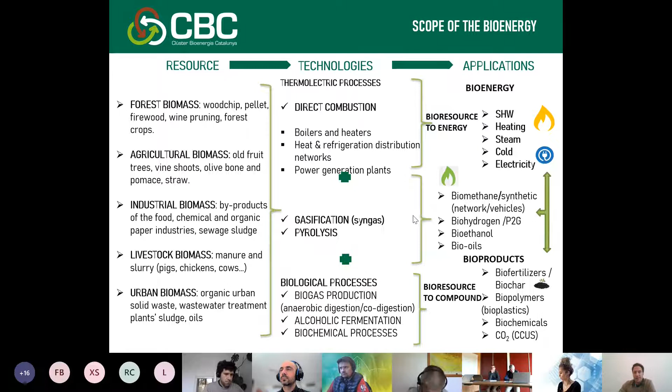Okay. Also, we have a strong opportunity to use biomass and the resources to make other products, byproducts, no? And how we could use them instead of plastics, as biopolymers, or as other types of biofertilizers, for industries that, as you know, are paying for energy. The cost of energy is very high at this moment.

Okay, in Europe it is the main renewable energy consumed at this moment, with 11% of the gross final consumption, and it's occupying 85% of the total thermal renewable energy. It's related to heat production. We are not talking about electricity, and it has a huge impact in decarbonizing our continent. Also, what is important is that the bioenergy industry in Europe is leading in technology, because over 74% of the global bioenergy suppliers are in Europe. And the situation of scarcity of materials and other products, or rare metals, for example, is not affecting our industry so much.

And also it's interesting in terms of job creation, because we need to use energies that help to create jobs on the land, in the countryside. So we need to promote this energy. Important to know that bioenergy is our circular energy, and we have to promote it as much as we can. And the bioeconomy is another step, no?

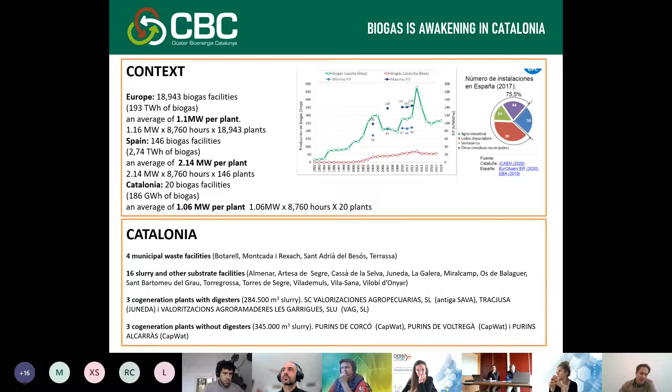Okay. Apart from that, with the current resources, we know that Spain could be the third European country producing biomethane. And we know that we could cover between 25 and 65% of the current natural gas demand.

There is some. Oui, tout à fait. Marc, we cannot hear you. Yes. You are in mute. Are you here? Yes. Yeah.

Okay. So sorry, so as I was saying, biomethane production in Europe has a strong potential, especially in countries like France and Germany, but also in Spain. And according to our experts, with the current resources here in Spain, it could be the third European country producing biomethane, and could cover between 25 and 65% of the current natural gas demand.

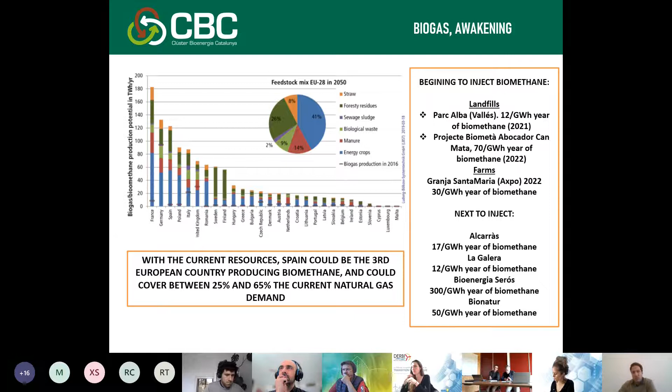We have some projects already injecting biomethane here in Catalonia, related to farms and landfills in this case, and there are some nearly to inject, because they are also managing the legal permits to do it. And this is the situation now. We hope that this year we will solve some issues here in Spain related to the biogas production and all the related legal framework. So we have a strong expectancy to develop the biogas market this year.

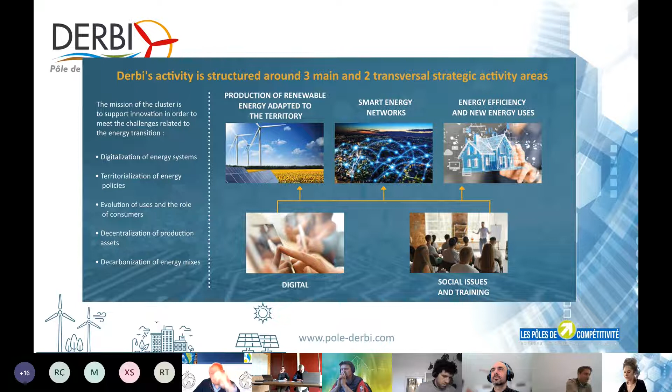So today, the DERBI competitiveness cluster, I will say just DERBI to be quicker, counts 170 members, including companies, research centers, laboratories, universities, higher education establishments, and institutional partners and local authorities. We can see in this page that our members deal with all sectors of energy transition, and we have 68 of these members in bioenergy, without counting the companies known for solar, storage, wind or other renewable energy, which also have projects in biogas or biomass.

So to talk more about figures in France and more specifically in Occitanie, our region, first of all, I would like to share with you some figures about biogas and methanization in France. We have more than 1,300 biogas units, with about 72% cogeneration units and 28% injection units.

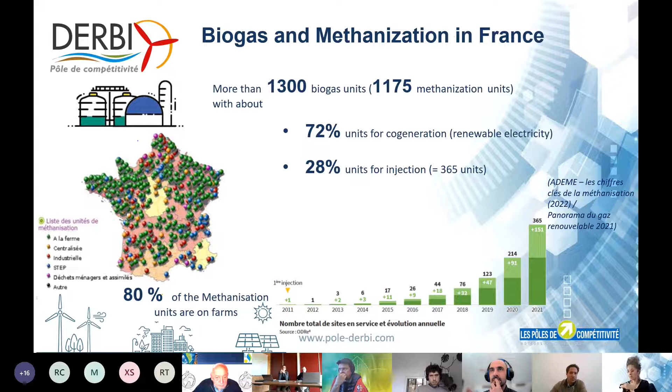At the bottom left, we notice points of different colors on a map that define the different types of biogas units. You can notice that the color green is the most present, which represents that 80% of biogas units are on farms in France. At the bottom right, we notice the increase in the number of sites in service in France. So now let's focus more on our region, Occitanie, which is near Catalonia.

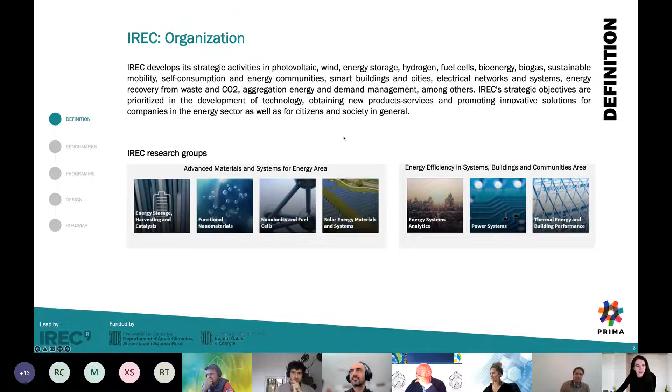Okay, thank you, Ramon. Regarding the laboratories we have at IREC, we have always worked in the blocks that Ramon mentioned. We have many labs. Some are more focused on materials and components, so you can imagine chemical engineers or physical engineers working on the components and materials. We also have 2 labs which are closer to the market and to the testing of technologies and systems.

These are the SEILAB based in Tarragona and the Smart Energy lab based in Barcelona. Those 2 labs, although very good for the validation and demonstration of these technologies and their integration as part of the system, have some limitations. We have only so far been able to try and test technologies up to TRL 6 or 7, meaning up to relevant environments, but not real environments.

So back in 2019, IREC proposed to the Catalan government the PRIMA platform, which aims to cope with the gap we have had so far at IREC - the gap between real environment validation and the technologies prior to their market release.

So our aim in PRIMA, our objective for the near future, will be to validate and demonstrate technologies, and to help and support companies - especially Catalan and Spanish companies, but also companies from Europe and abroad - to validate their technologies and develop them before they are released to the market.

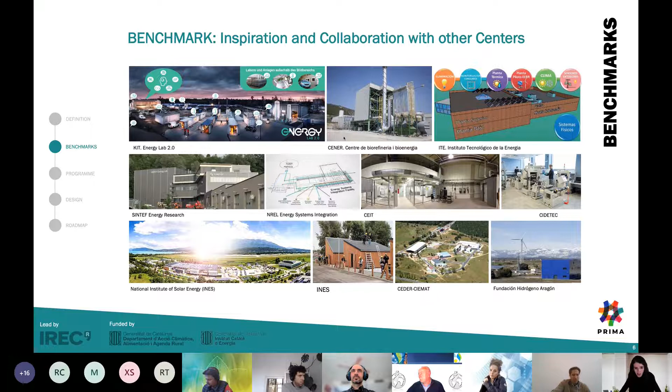Storage in terms of electric storage and thermal storage, climate neutrality by developing technologies in decarbonization, removal of fossil fuels in thermal activities especially. That means more use of biomass, biogas and hydrogen.

In terms of waste and bioenergy recovery, probably the topic most relevant for today's session, we are working to develop a bioenergy plant where we can deal with the energy recovery of organic waste from livestock and the agri-food industry, to increase production of biogas, the quality of biomethane, biohydrogen, and different types of renewable gas. Also, I'd like to mention that our PRIMA platform is located in the countryside of Catalonia, in Osona, which I'll show later.

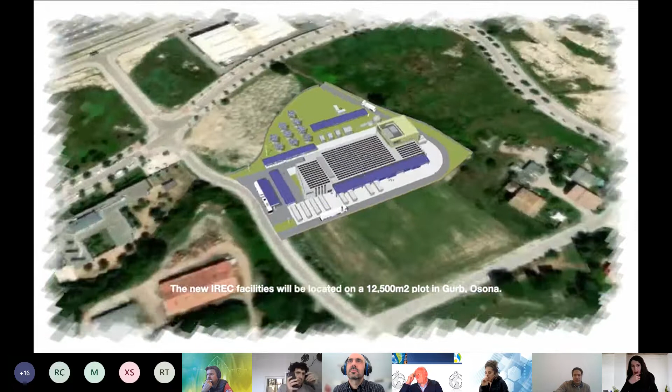So, as I said, we are planning to build the PRIMA platform in the center of Catalonia, in Osona, and it's going to have a building of about 3,000 square meters with an area of outside space of 12,000 square meters. We are planning to have lots of energy from renewables, so we can be as self-sufficient as possible and as energy positive as possible.

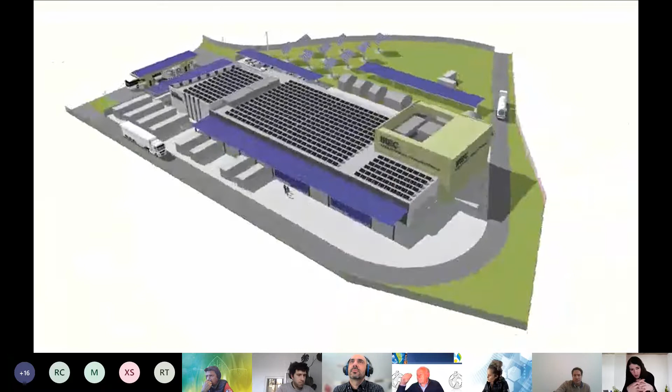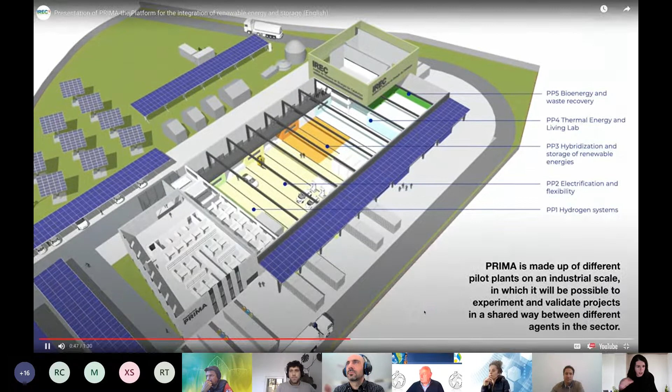We will have a space for the test of hydrogen systems, biogas, also different concepts of methanation and biomethane. Also inside, as you can see here on the left, we will have offices for companies and also offices to host people from other institutions abroad or also from PhD students.

And basically, we hope that by offering this installation where different energy vectors can work together, we can push on this energy transition. I haven't mentioned it so far, but we also will have a hub for sustainable mobility, where we plan to install a hydrogen station, a biomethane station, as well as electric power charging stations, ultra rapid, by the way. And yeah, that's basically the PRIMA platform.

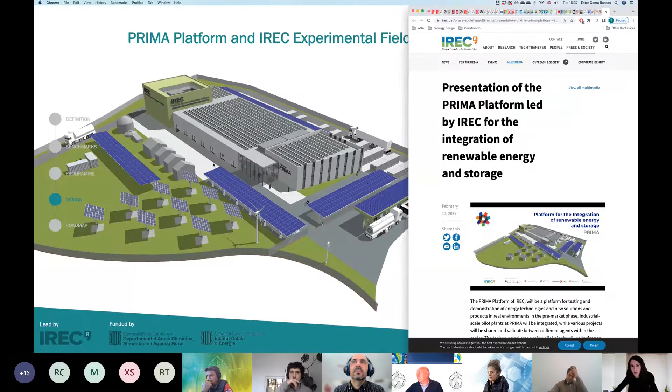You can know more about it on the website. I'm not going to extend on that because we don't have more time. Also, if we share the presentation later, you have the chance here to look a little bit about all the different facilities that we are planning to offer within PRIMA. You can read that in more detail. It's what I've been explaining in the video, but here you have a bit more time to read it and have a look.

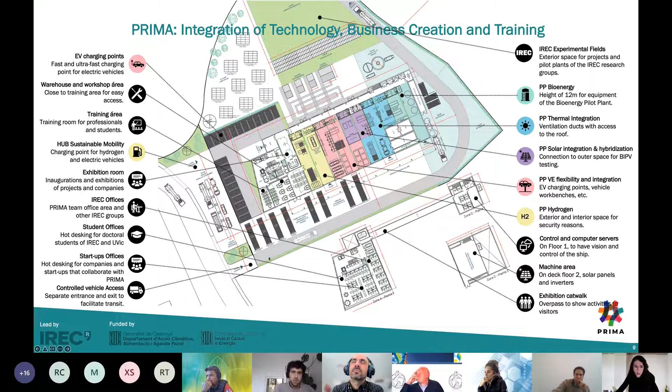The different pilot plants that we will have: the bioenergy, the thermal integration, the solar integration and hybridization, flexibility and integration, and the hydrogen plant. All of them will have not only the inside space, the space inside the building, but they will also have some space outside to bring containers, lorry containers, and do the tests outside.

And finally, to finish now, a bit of a roadmap so you can know where we are in the project, and hopefully we can collaborate in the future when PRIMA is ready. So far in 2021, we have developed the definition of the project brief, the agreements between the political institutions and IREC to get a place to go and a plot of land to build our building.

At the moment, we are at the design stage, starting the tendering process, not only of the project, but also of the construction of the building. And we hope, our aim is that by the end of this year, we will have started the construction of the building. So by mid-2023, we have the building ready to start the operation of the PRIMA activity.

We know that it's quite optimistic, and especially when you have tenders and public tenders, but we also know that the energy transition is essential, and we want to be ready for that. We will see if we can achieve our targets, but that's our aim.

And before I finish, I would like to say that although PRIMA is not available as a place yet, IREC is welcome to collaborate with any of your institutions, and also we can start developing projects and consortiums together. So when PRIMA is ready, we have the projects, also the funding ready for it.

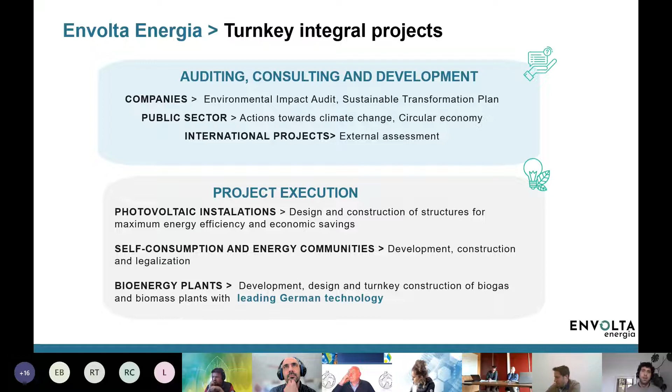Our integral vision of a project: we audit, give consulting, and then the development of any project in renewable energies for both the public sector and private companies. And we also develop international projects. For photovoltaic installations, we build turnkey here nationally. And for the bioenergy plants, as I said before, we rely on our international partners. In the case of biogas, it is EnviTec Biogas.

EnviTec Biogas is a leading company in Europe. It's the first supplier of turnkey projects in Europe. It covers the entire value chain of biogas, from development to construction and even the operation of the plants. EnviTec operates its own biogas plants, so this allows big investment in R&D to be more efficient in gas production. The annual turnover of EnviTec Biogas is 190 million euros. It has more than 500 employees with 16 subsidiaries around the world.

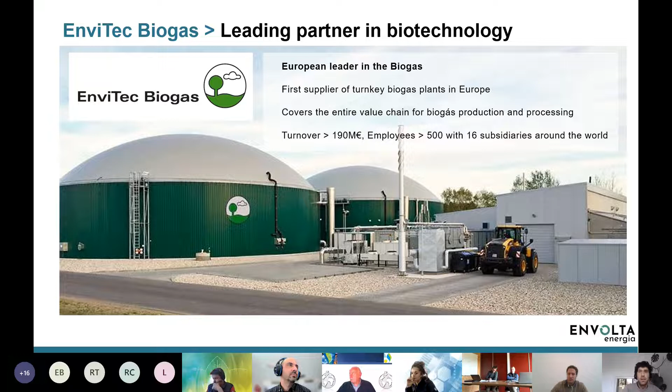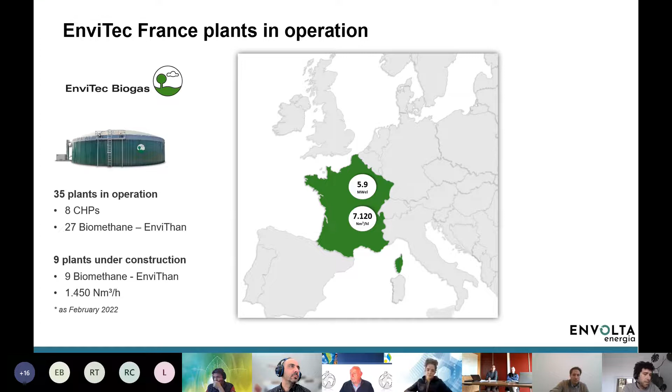I'd like to explain today what EnviTec has done in the last years, a lot of plants in France, but also explain what it is doing with LNG, which is what I consider the paradigm shift of biogas in Europe. Internationally, EnviTec built more than 700 plants. In France, there are 35 plants in operation, 9 plants under construction, and some more in the pipeline. So EnviTec has participated in this big increase of biogas plants in France in the last years.

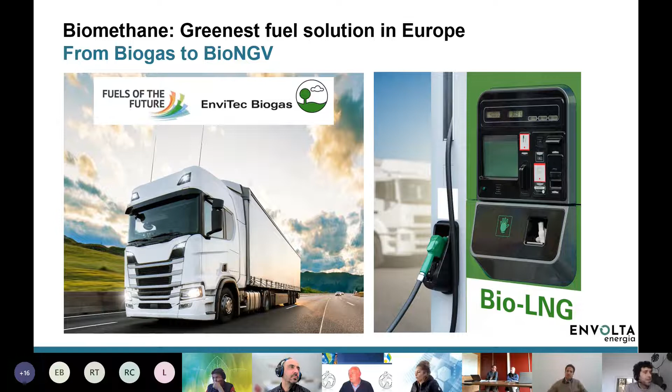Today, EnviTec is shifting from the traditional biomethane plants to bio-NGVs. Bio-NGV is the use of natural gas for vehicles from biogas, biomethane. The application of bio-NGVs opens a big potential where it no longer relies on the aids from each country, and provides a global market. EnviTec foresees a big demand for bio-NGVs. So bio-NGVs are mostly bio-CNG, which is bio-compressed natural gas, or bio-LNG, which is bio-liquefied natural gas. EnviTec has pilot plants and operational plants both in bio-CNG and bio-LNG.

What is the difference? Bio-LNG is when you cool down the biomethane or the natural gas. So it has more density, it takes less storage space, and it is an easy replacement for a conventional diesel motor. This makes it a good solution for long-haul truck companies and sea vessels. LNG can also be transported in tankers or in trucks around Europe. The difference with bio-CNG is that it's easier to refuel in the stations and also needs lower investment costs. So both alternatives are very good. It depends on each project.

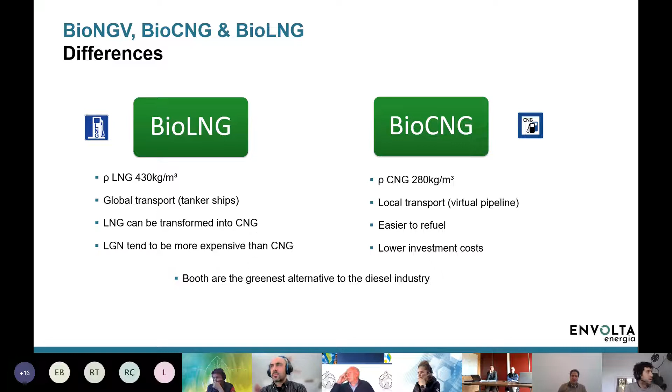Why do we expect a big increase of bio-NGVs? The Renewable Energy Directive 2 in Europe, which was approved in 2018, implements a uniform framework for renewable energies in the whole of Europe. It includes legally binding targets on each country of a 32% share of renewable energies, a reduction of greenhouse gas emissions of 40%, and requires an advanced biofuel and biogas quota of minimum 3.5% in the transportation sector. Also, it brings a global system of computation for the CO2 certification of biofuels, which will be under guarantees of origin.

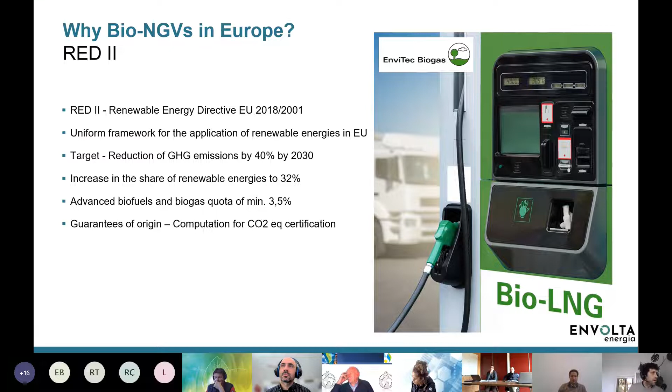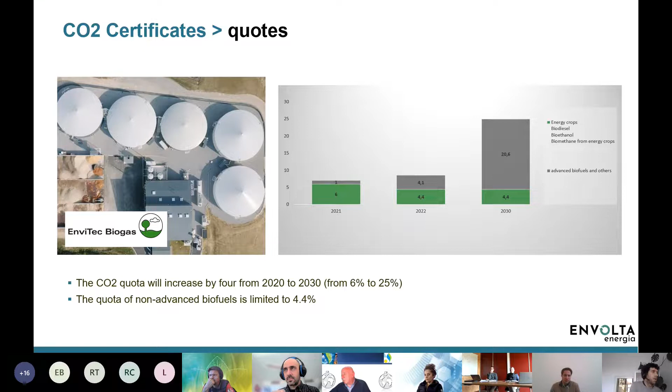So you can imagine that bio-LNG and bio-CNG are really a good solution for heavy transport, which needs a quick solution. It is also a solution for sea transport and cruisers. It's a solution that is already available. It has a low cost of investment. It reduces a lot of other harmful gases from combustion, like sulfur oxides and nitrogen oxides, and reduces noise emissions. For transport and logistic companies, this means lowest cost with more sustainable transport.

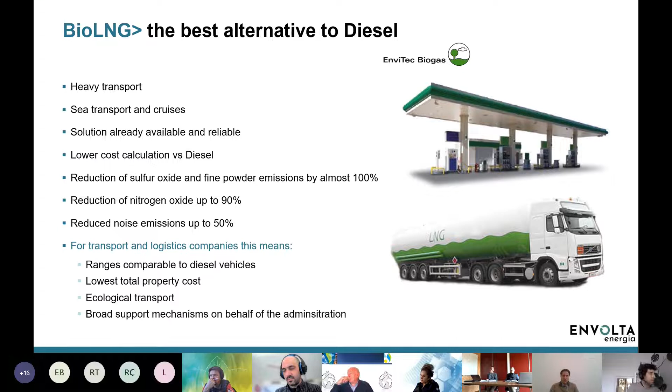So the case study I bring here today is the bioenergy plant concept. EnviTec bought a plant that was already built by EnviTec. In 2009, it was one of the biggest plants in Europe with electrical production in mind, and it's transforming it to produce LNG. The LNG will be produced not only in this plant, but in other plants of Germany, and it will be liquefied in this plant. After liquefaction, the LNG will be transported to gas stations, and then the GHG quota will be traded. So this is the case study.

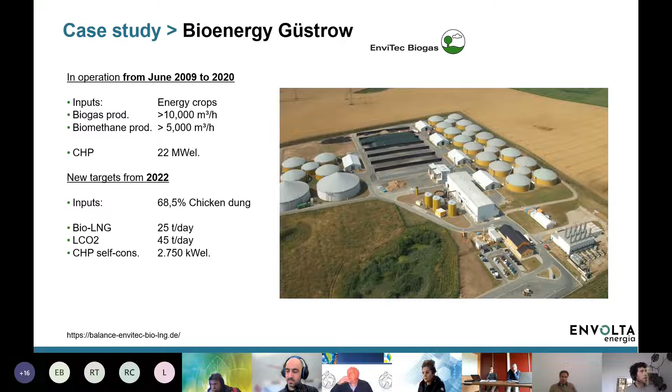Built in 2009, it was producing 22 megawatts electric with more than 25 digesters. As many of the biogas plants in Germany, it mostly used energy crops. As I presented before, now the interest is on producing biomethane from manure. So EnviTec prepared this plan in order to receive chicken dung instead of energy crops, and is doing this transition. The target from 2022 will be producing 25 tons of LNG per day, and also using the LCO2. This is the off-gas you have once you upgrade the biogas. You have biomethane and you have CO2. So it will treat also the liquefied CO2.

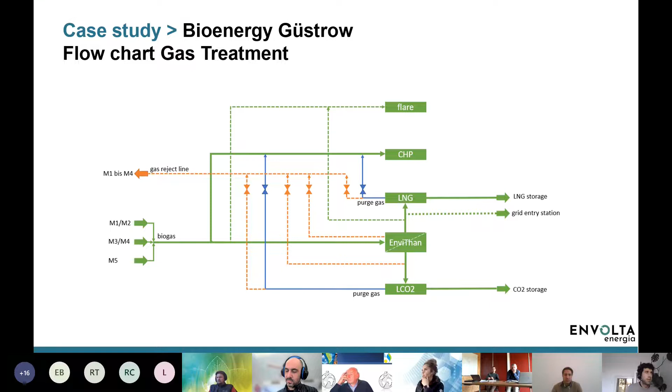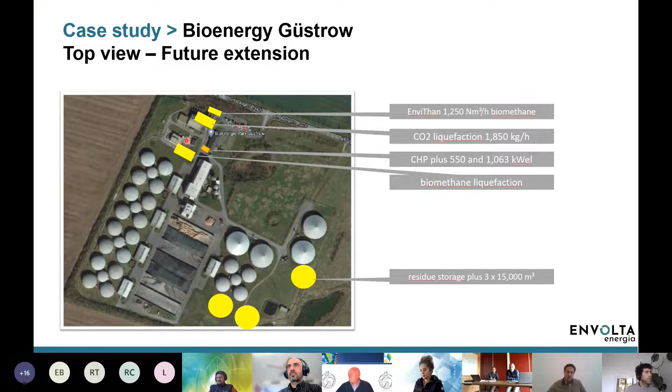The plant is not a small plant. It was built with modules of biogas digesters, 5 biogas digesters with 1 intake tank for liquid manure, and this modular design was replicated 5 times. Also, there were the CHPs and the residue storage tanks. The extension of the plant plans the building of more residue storage tanks, together with a biomethane liquefaction plant and the biomethane upgrading plant. So this is how the bio-LNG plant will look.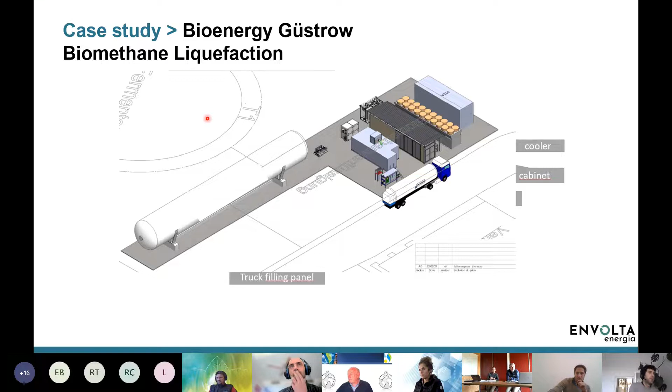Marius, it's time, 2 minutes to close. Yeah. So it's mostly over.

So bio-CNG and bio-LNG are a real, actual alternative to diesel. It's a solution we have today, and it's a solution that can represent a very big reduction of CO2 emissions. This is why we believe it will be strongly developed in the coming years in Europe.

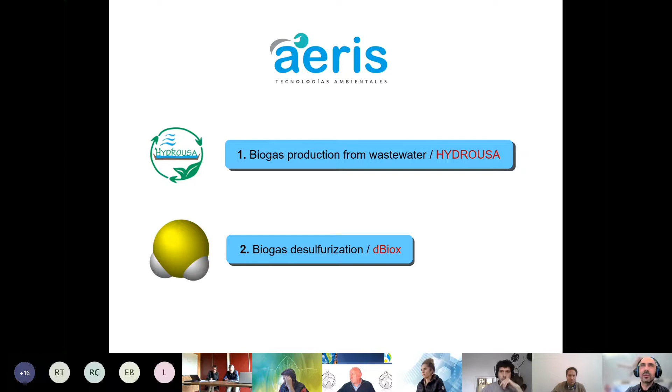So today, in regards to these things we are discussing, I would like to tell you mostly about two technologies that we have that are deeply related with energy production and saving. Number one would be our HYDROUSA technology, which aims to produce biogas directly from wastewater. And the second technology, which we commercialize in partnership with Ecotec, would be the bioreactor for biogas desulfurization. So it's two different technologies, not related to one another, but I believe that they fit quite well in today's session.

So very briefly, I'm showing you the HYDROUSA project. This is a publicly funded project from 2020. And it aims at developing innovative solutions that can cope with water scarcity in certain regions of the European Union. For example, in Mediterranean countries, on our eastern coast in Spain, we are suffering from water scarcity. We are aiming to find a solution for these problems within this project.

So what we do here is to use wastewater, rainwater and water vapor from air, different water sources, and we try to produce something valuable out of them, like biogas or crops or different added value products. And at the same time, we try to develop advanced and profitable business models that can give some richness locally to the places where these are implemented.

Okay. So as you can see, the diagram of the project is quite complex, but I would like to focus your attention here. This is a UASB reactor, which has been designed and developed by AERIS and which aims at treating wastewater from the local town of Antissa on the island of Lesbos in Greece. And currently this system is treating all the wastewater from this town and producing some valuable products.

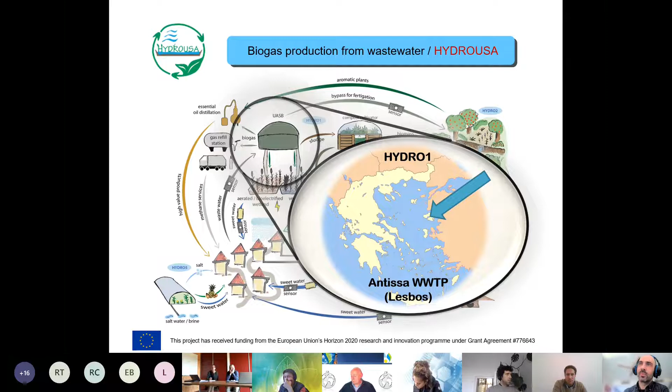Let me show you. As I told you, this has been implemented in the wastewater treatment plant of Antissa in Lesbos, and it consists of a series of processes which turn wastewater into valuable products. So first of all, we have this UASB, which is a kind of anaerobic digester, which treats wastewater and produces biogas and some other valuable compounds. So wastewater, this is the red arrow, goes out of the UASB reactor partially treated. More than 70% of the solids and of the COD has been removed.

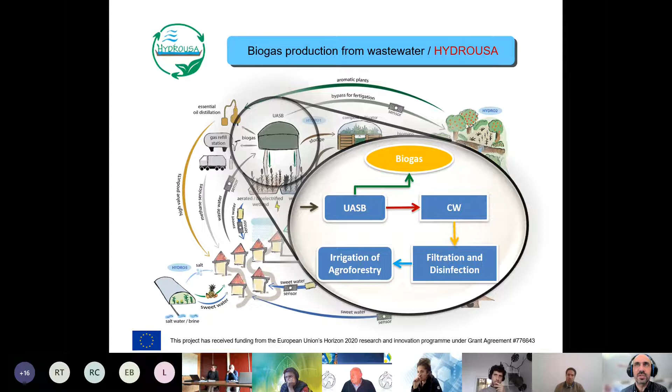Then it goes across some constructed wetlands in which the purification is completed. Then wastewater crosses some processes of filtration and disinfection. And finally, this now clean water is used for irrigation of crops. So, summarizing everything, we have sewage coming from a wastewater treatment plant, more than 10,000 cubic meters a year. All this water is treated in a series of UASB reactors, anaerobic reactors, in which more than 70% of the organic matter and of the total solids are removed. Then it crosses some constructed wetlands and is used for irrigation of crops.

But also, and this is really interesting in the frame of this session, we're producing around 4 kilowatt hours every hour. This is around 100 kilowatt hours a day of biogas, which is then compressed and used to fuel a vehicle, which is then employed for publicity purposes within the project.

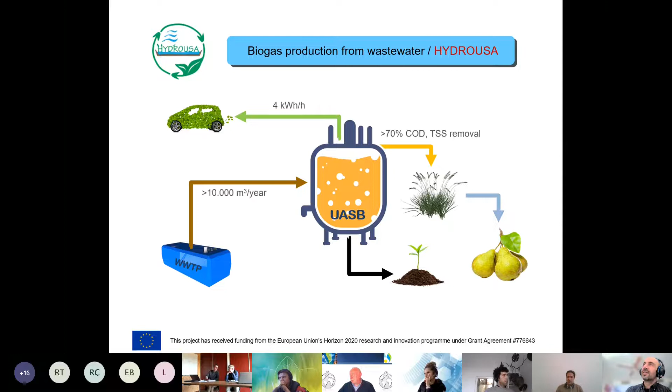Also, a very small amount of sludge is produced and then used for composting, and then it goes again to the crops. So it's kind of circular, all that you are seeing. Okay, so from a technical point of view, you can see here the design of the UASB reactors. These are not so big, actually.

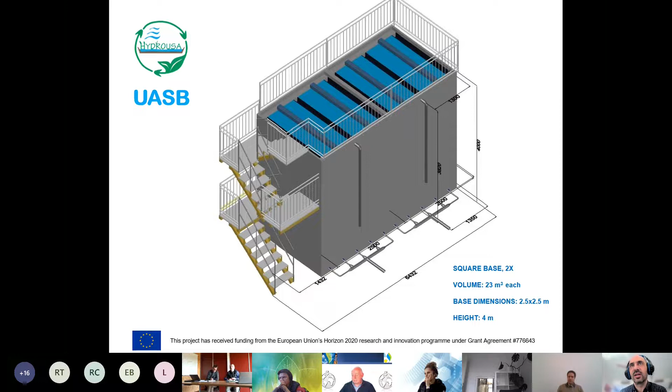I pass to the other system I was telling you about, and this is a system which is used for biogas desulfurization. As you know, biogas contains a fairly important amount of H2S, hydrogen sulfide, which is very corrosive, harmful, and so on. And this concentration can reach up to 3%. This is 30,000 ppm. So you can imagine that this can lead to big problems in the engines, in the systems downstream. So after many years of research at the Autonomous University of Barcelona, we came up with this design of a biological reactor which can cope with such high H2S concentrations.

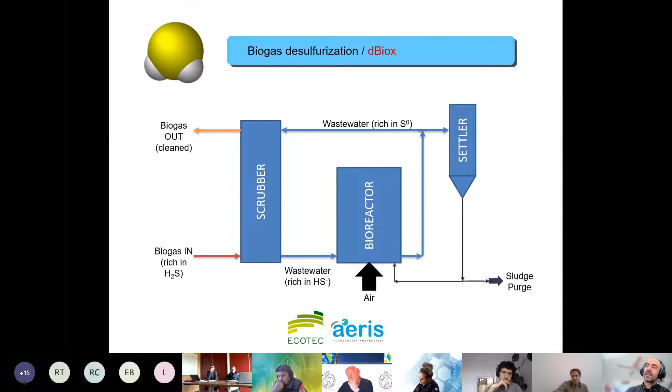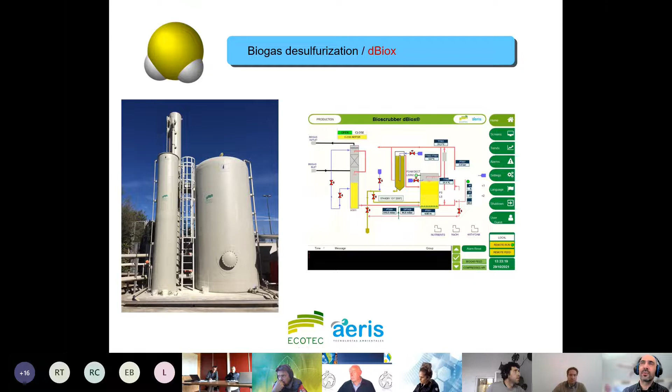Okay, so let me show you what it looks like. In the left picture, you can see an actual dBiox system, which is operating in southern Spain. In the right side, you can see the SCADA. So you can see more or less how everything is connected, how it works and is controlled. And this particular system is aimed at treating around 200 cubic meters per hour of biogas, so it's not a really big flow. But as you can see, the concentration in H2S is really high.

It's 2.2%, 22,000 ppm. So the removal efficiency of this system is really high, above 99.9%. We can see that the H2S outlet concentration is below 25 ppm. So this is a safe biogas for engines. And the customer actually is really happy about this.

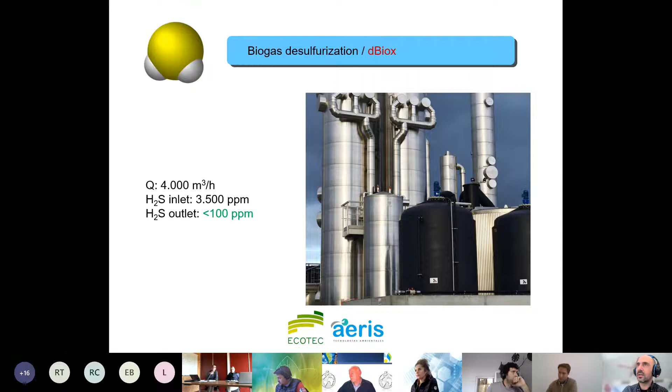For example, this is a very big plant working in Denmark right now. It has a biogas flow rate of 4,000 cubic meters per hour, with an H2S inlet concentration of 3,500 ppm, and as you can see, the H2S outlet concentration is below 100 ppm. So again, it's a pretty efficient and also cost-effective system.

You can see some other dBiox systems we have commercialized in partnership with Ecotec. So we have a few examples here in Spain, many of them actually in Scandinavia, and we have built some of these systems all around the world, Latin America, Africa as well. So we know the stuff.

So let me show you just a few quick take-home ideas. AERIS can be a reliable partner for you in R&D activities, but also in industrial projects. We can design and we can implement systems for air treatment, biogas treatment and production, and water treatment. And especially, we're always open to collaborate in energy production and energy saving related projects.

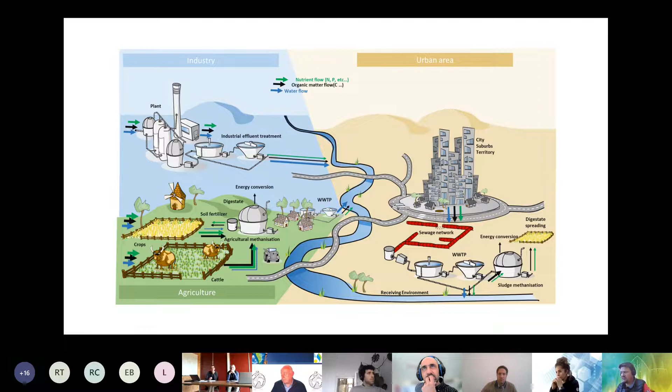CRIT means Regional Center for Innovation and Technology Transfer, and GPTE means Chemical Engineering and Environmental Technologies. We are supported by the region, Occitanie, and we are members of different kinds of innovation clusters. Especially, we try to have actions for the National Center for Biogas and Methanization. So first, this is the same scheme as we saw before. We can help with wastewater treatment and energy production from agriculture, from industry, or for urban areas. And we have knowledge and can help with everything about bioprocessing of these wastes and wastewaters for their valorization.

We have three main competences: wastewater treatment and valorization, energy production mainly by biogas, and also chemical production, because we can also build very interesting chemicals from waste and wastewaters. We also have special skills for interactions between physical, chemical, and biological activities, especially for cementitious material. And we know a bit about the sulfur cycle, so I was very interested by the last presentation. We try to have experimental aspects for all of this, but also process modeling to help understand everything. And we have a colleague specialized in a more global point of view, with industrial chain modeling and the urban integration of the innovation.

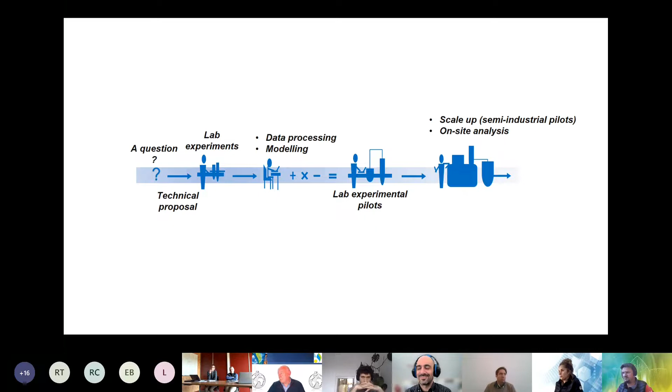So our job is to answer questions, and we have different ways to answer them. We can have lab experiments, data processing and modeling. We can perform laboratory experiments, we try to scale up to some industrial pilots, and we can also help with on-site analysis for companies implementing something new or trying to solve a very annoying issue that is common, unfortunately. So we use laboratory tools for characterization of everything: the flows, the incoming matter, the gas and so on. We use modeling, simulation and experimental tools. So this is just to have it in mind.

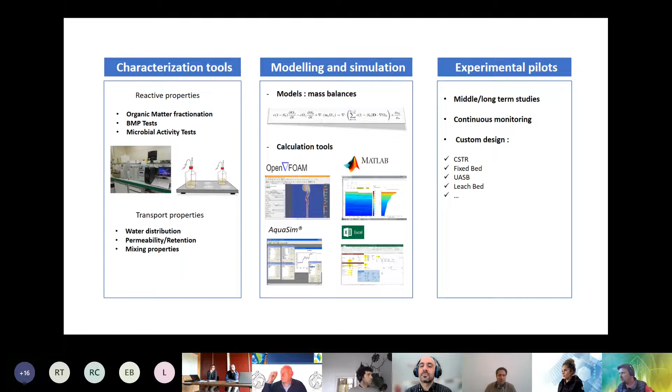And I will talk a bit more about the experimental pilots, because this is the kind of pilots we generally have, and I think a lot of research centers have these types of pilots when they deal with biogas and methane production. So we have different types. The previous presenter talked about UASB; this is what we have in the lab for this, with the granules inside. But we also have these ones for more solid matter. We try to make as much information available as possible, so we monitor biogas, pH and temperature, and we can sample everything to make more analysis. Sometimes simple bottles are very useful to answer questions also.

But the point of my presentation is more to talk about a more ambitious project we have, called the platform Solidia. This project is now in its second year since the real beginning. Just a short comment: it's a very bad idea to start a project within a pandemic followed by a war. I think everyone has difficulties here. So we have had difficulties keeping this project going, but we keep fighting, and we are pretty confident now.

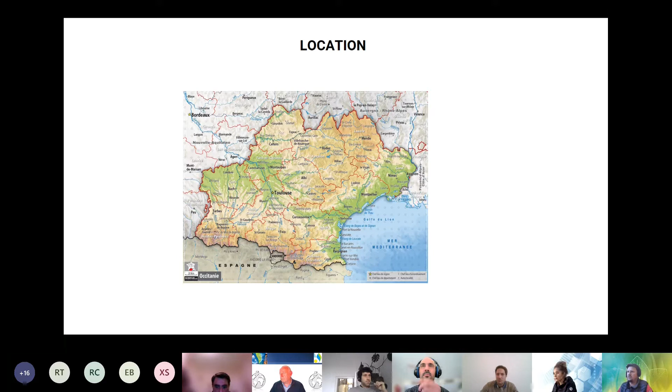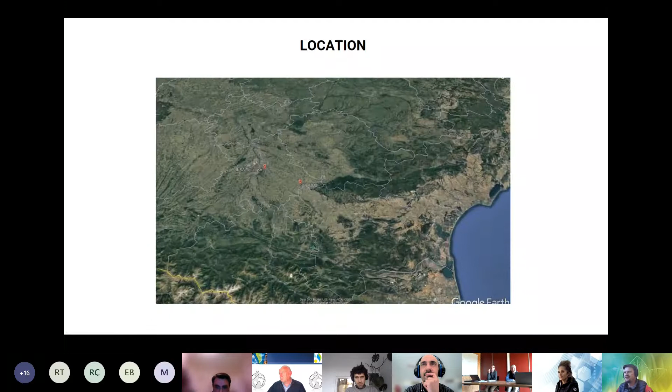So this is where we are. Toulouse is just on the other side of the Pyrenees, and I think I have this so you can visualize more where we are. So Toulouse is where the lab is, and the platform and the biogas plant we are dealing with is somewhere in the country, close to Villefranche-de-Lauragais.

What we have is we have connected this plant. Sorry, this is not what I wanted to do. I'm sorry for this, I'll go to the end. Okay, oh sorry.

What we have in this plant is we have connected the biogas production to a new platform. The building of this new platform has just started last month, and we have to be able to deal with new services that we can provide. Everything about anaerobic digestion processes and digestate valorization is already implemented in the platform, but what's new is the biogas valorization.

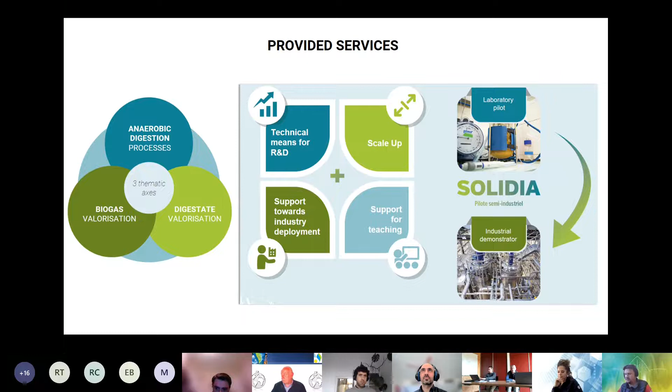The aim of the platform is to propose an intermediate scale between the pure laboratory pilot scale and the real world of industrial demonstration, because it's sometimes very difficult to go from 10 liters to 300 or 3,000 cubic meters. So we can provide this service, with the purpose of providing technical help for research and development, especially for scaling up. And we want to accompany, help, or go with partners towards the industrialization of their solutions. Hopefully this will also be a very interesting way to help with training for teaching and engineering schools.

So the main target is something between TRL 5 and 7, for technology demonstration at semi-industrial level. We try to have industrial considerations about everything regarding regulation and safety - these will be proposed on the platform, or rather, it's an obligation. This is very helpful for the project holders also, and we will help them.

Sometimes using a big scale is also interesting even for low TRL, because sometimes you deal with heterogeneous systems and you cannot make simple experiments at the lab scale. So we also have some projects from low TRL.

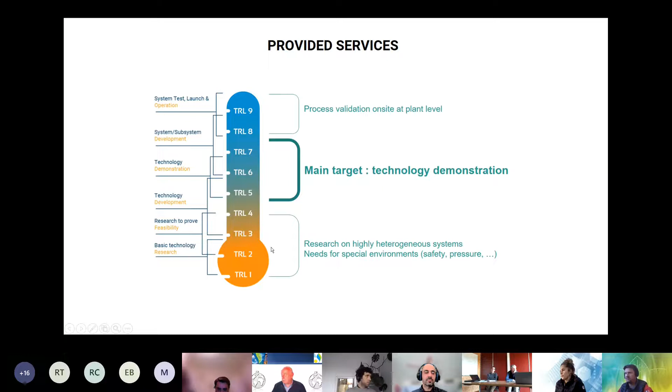From now, we have already dealt with some anaerobic digestion projects with French ADEME, the energy and environment agency in France, about a special technology called leaching bed anaerobic digestion. We have also performed trials for projects about the durability of cement materials. And we also have projects with digestate fractionation in order to get the best of the digestate to give back to the soil, or making products, especially for nitrogen recovery. This is what we used to have.

Now what we want to have - I'm sorry, I don't have pictures of it because it's an ongoing project in the building process now, but I have the main ideas here. We want to deal with a new biogas valorization facility for everything about gas epuration and gas enrichment. Epuration meaning removal of undesired compounds like CO2 or H2S, as previously mentioned. Enrichment - we have a lot of demand for what we call methanation, the conversion of CO2 by adding hydrogen from renewable electricity. The platform can also be useful for everything about control of gas quality. So the idea is to develop what's been mentioned before - what biomethane can be useful for: energy systems, the natural gas grid, or biofuel.

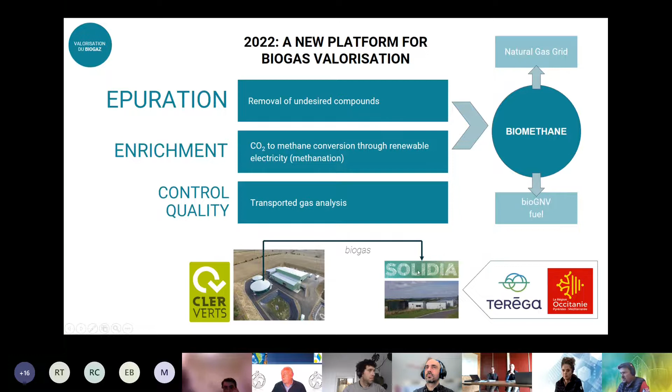So we have connected this plant to the platform, and this is how things look. We have here the gas coming from the Envitec Biogas facility at the Cler Verts plant.

This makes it possible for us to have about 40 normal cubic meters per hour with classical biogas, around 60% CH4. We also have a compression system, so we can distribute this biogas up to 10 bars for different pilots accepted on the platform. So we can help companies test their new technologies, make essays, and develop further toward the market.

We also have electrolysis here from electricity, so we can produce H2 up to 10 normal cubic meters per hour. We can also help pilots that want to deal with methanation. We have some space to stay warm and dry, and we already have two main projects about methanation that will be accepted on the platform. I think we are open for every collaboration for the future.

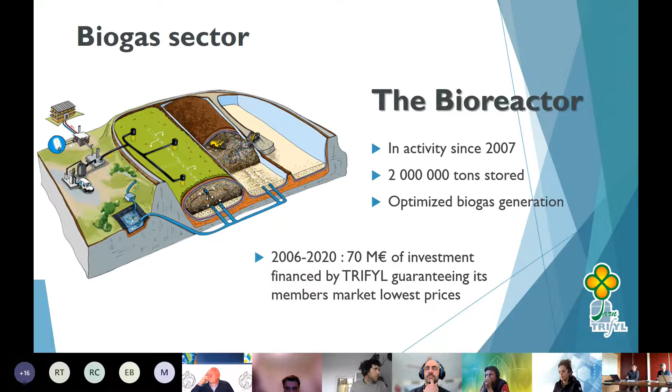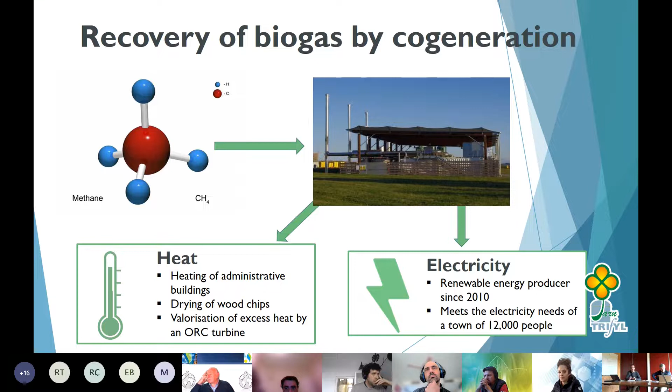We have a bigger plant for drying wood chips - next to the biogas plant we have a platform where we produce wood, which I'll explain in a few slides. We also implement an organic Rankine cycle turbine to valorize the excess heat, producing a bit more electricity with it - about 200 kilowatts.

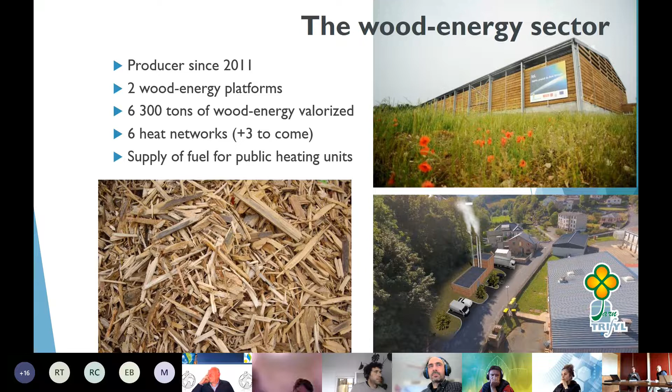So we have a photo on the right, where it's not a big plant, because we are not a very urban country, but it's a little city, and we heat 5 or 6 public buildings in the city, for example.

Okay, for the project now, TH 2030, this is a global project with 4 axes. The first one is waste prevention, with the objective to reduce waste production.

We have the ambition to reduce waste production by 10%, beginning in 2015 with objective 2025. The second axis is sorting of organic waste, and we would like, following French law, to extract the organic fraction from the trash. Third, extension of sorting instructions.

We have one plant in Labruguière near Castres. This is a new plant just to recycle all plastic packaging. And another plant in Blaye-les-Mines, we would like to prepare different waste, where we would like to valorize all-comers.

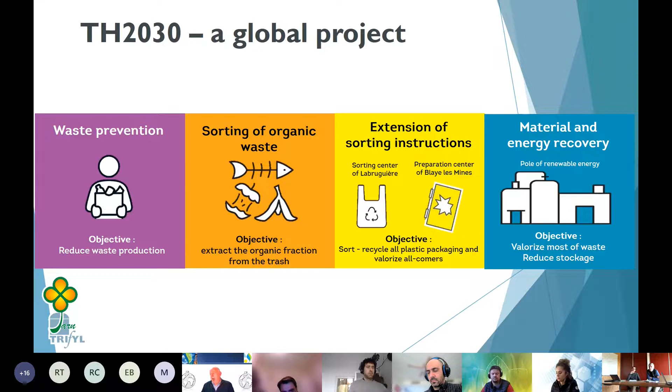And lastly, we develop material and energy recovery with a new pole of renewable energy here at the headquarters of Trifyl, with the objective to valorize most of the waste and also to reduce the stockage. We would like to reduce the present stockage by 80%.

This is also a territorial project. We develop 3 industrial units in synergy: one for paper and packaging valorization center, another for bulky waste preparation center, and the most important here, a waste sorting and recovery plant. We are going to treat the residual waste, the organic waste, and different sorting errors or refined bulky waste.

And we produce, one is compost for agricultural use, two, biogas, with production of approximately 700 cubic meters of gas, and refuse-derived fuel, a new energy for us. We would like to develop a circular economy with one important plant, an agricultural plant just 2 kilometers from our plant.

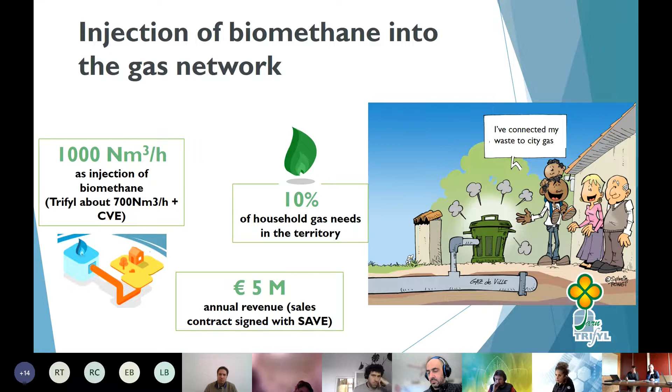We have also a contract with one company. Just 2 minutes, just 2 minutes.

Yeah, okay. We have also invested in refuse-derived fuels, about 41 tons produced, and we self-consume internally particularly 16 tons, with an output of 8 megawatts, and two-thirds will be used by local industry.

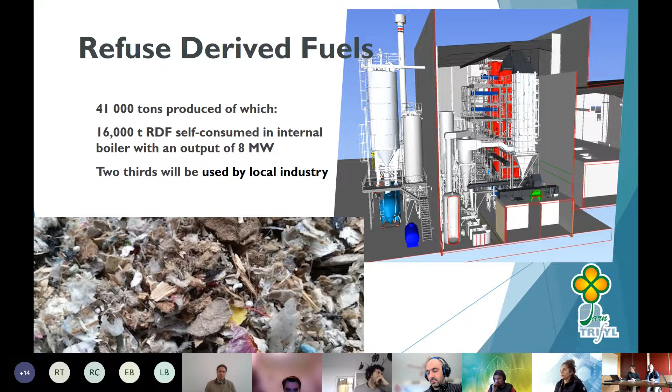Also, we produce hydrogen from the three fuel resources, biogas or biomass, and we will organize the distribution station on the territory, probably 2 stations between 20 and 30 kilometers apart.

In 1 minute, the innovation at Trifyl. Okay, we just wanted to present three research projects we are involved in. DéMétha - Sébastien from INSA talked a little bit about it a few minutes ago.

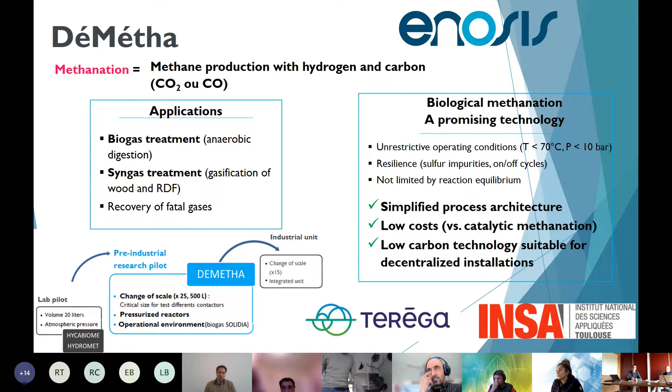The idea is to develop biological methanation that would be more efficient than thermochemical methanation. The idea at the end could be to valorize the CO2 from the biogas into methane with injection of energy, of course. So it could, at the end, avoid the classical upgrading units of biogas. I'll resume very quickly.

We are involved in pyrogasification because we saw we had some waste wood, and not only clean waste wood, but also waste wood with paints and things like that. And on the RDF, we talked a little bit just before. So some tests are going to be developed this year on this type of waste, and this could join with the DéMétha project later.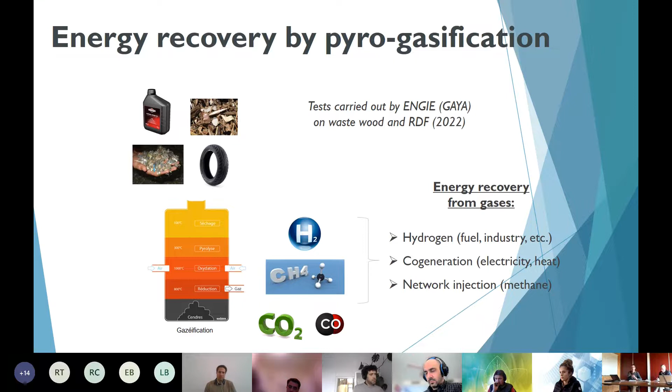Thank you so much. When it's interesting, we don't count time, but thanks for this relevant presentation from Tréfil. So last but not least, to sum up, I give the floor to Paul and Lionel from Terega, who, as far as I see, are already responding to the questions raised. So you can share your presentation.

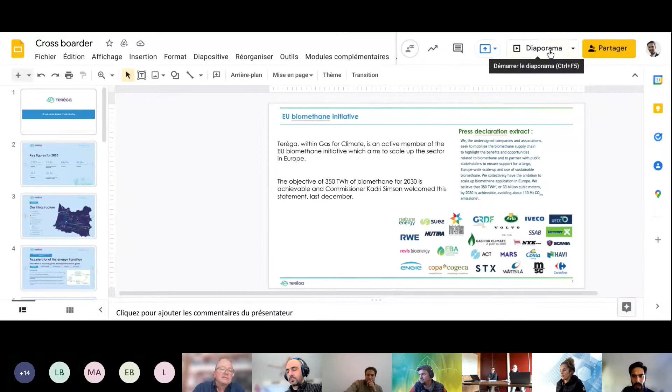Thank you. Okay, let me try to share my... How can I do that? It's okay? Yes, you can put it. Voilà. How much time do we have? 15 minutes? Okay, fine. Okay, go. So do you see my screen? Yes. Okay, thanks. Okay, so after being mentioned by Solidia and Tréfil, thanks for that.

I will try to present to you who we are. So Terega is a French TSO, a gas transmission system operator of southwestern France. So the gas transportation is managed by two TSOs in France. And to compare, in Spain, the Spanish equivalent is Enagas. So here are some very quick key figures to describe more what we do, who we are.

So we possess more than 5,000 kilometers of pipelines, which represent almost 16% of the French gas transmission grid. We also operate storage, with two massive storage sites in our region. Our storage activity represents almost 26% of the French storage capacities, and it represents 1 year of gas consumption in our region too. So these storage capacities are strategic for France and Spain. The turnover generated by our activity is around 460 million, and we are more than 660 employees.

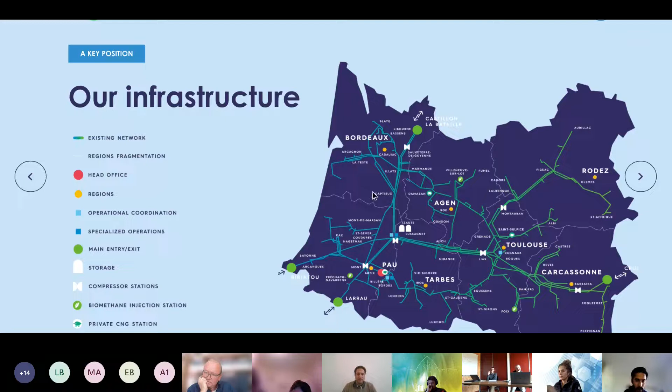So for us, the energy transition is a central topic, and it's also a part of our business strategy. As we don't possess the molecules moving along our pipes, we tend to encourage the development of new gases to decarbonize what we are transporting, and to increase the development of these sectors. So we are very involved, as you can see, in biomethane, but also synthetic methane, NGV and bio-GNV, hydrogen, and sector coupling by multi-energy. But here, as I'm talking about biomethane, I will show you what we can do and the different levels of action where we try to have an impact.

So first, we have decided to develop a new business unit, the biomethane and gas mobility business unit. And it's not the only one. With this, we have created 2 other business units, one on digital and one on hydrogen, made for multi-energy and digital.

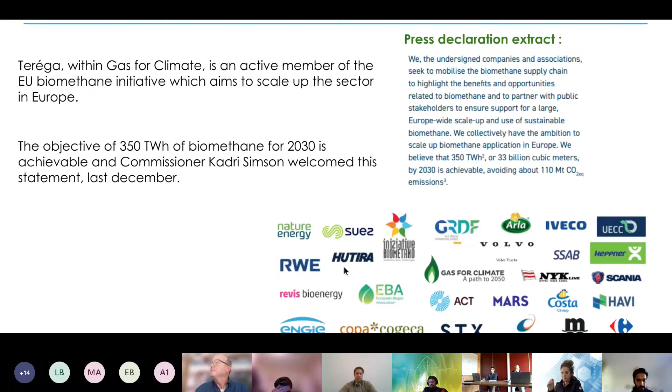So that's what we do in general to participate, or to intend to have an impact on the legislation, the reglementation, and the regulation of biomethane in France and for Terega precisely. So now I will let Lionel present you the translation, in fact, and the reality of what it looks like on the ground.

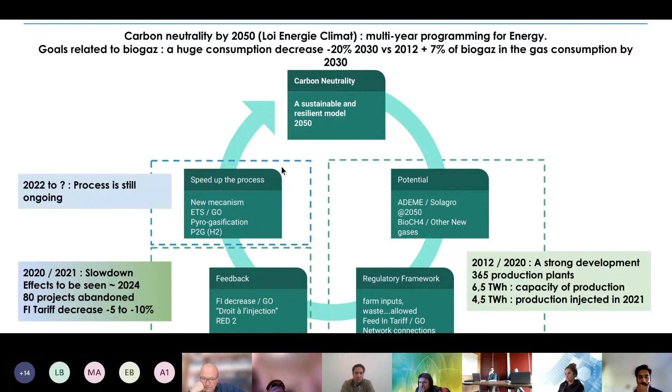Oh. Ah, magnifique. Okay, so

Now from a network point of view, this scheme has been modified and improved all over the years. It shows how to maximize the biogas potential injection, taking into account the present and the supposed future network capacities. First, we evaluate all the potential, and it is equal today to a third of the national gas consumption, biomethane only, of course, around 150 terawatt-hours, in line with the figure presented earlier by Marc, I guess.

Then, to be efficient, France has been virtually split into 500 zones, taking into account, again, networks and the potential. Within a zone, DSO and TSO evaluate together the best infrastructure scheme, which is determined as the best combination between CapEx and inputs that can be valorized. When this scheme is selected by the network operators, it is presented to all the stakeholders linked to that geographical zone. Remember, we are in France. There are a lot of stakeholders, municipalities, project owners, citizens, and so on.

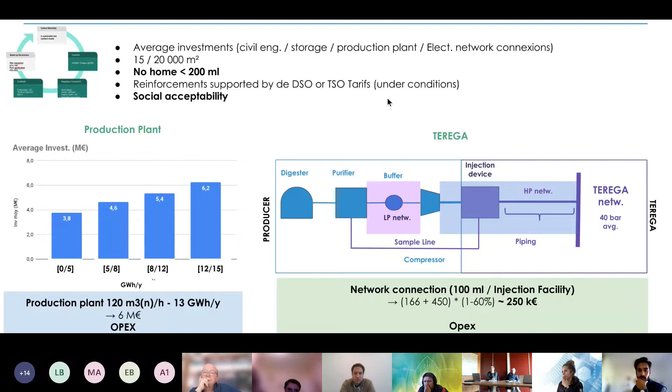So next, Paul, please. 2-3 minutes left. Okay. Okay, it will be enough.

What can a producer expect? That's the main question. The feed-in tariff has been built in order to ensure an internal rate of profitability close to, let's say, 10%. It was very attractive. This tariff is decreasing with the production capacity. Only the plants that are producing less than 25 gigawatt-hours a year are now eligible for this tariff. It's very important to note. All the plants that are producing today are not concerned by this limitation. Okay, some of them are huge plants.

We have here in Terega 2 plants connected or soon connected that can produce around 400 gigawatt-hours a year. One of them is the biggest in France. So this tariff is completed by premiums. One of them can be negative, especially to ferment farm inputs. There is a premium for probably one of the most difficult allowed wastes, because there is water, there are bacteria. And if the producer benefits from other subsidies, then the tariff is lowered by €5 per megawatt-hour. Okay, you cannot add subsidies from the state.

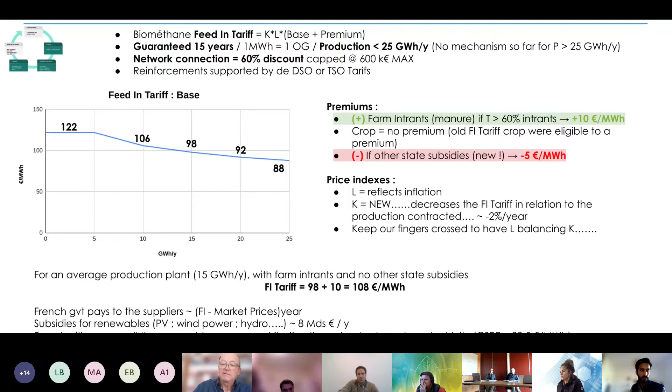Okay, some key figures maybe. I saw that Tristan gave some figures in the chat. You can read them. To be quick, maybe some key figures. Past year, in 2021, 4.5 terawatt hours were injected. That represents around 1% of the French national gas consumption.

In deeper detail, if we look day by day, this injection can reach a higher rate, around 8%, when of course the consumption is low, and we expect to reach a rate of around 10% next year.